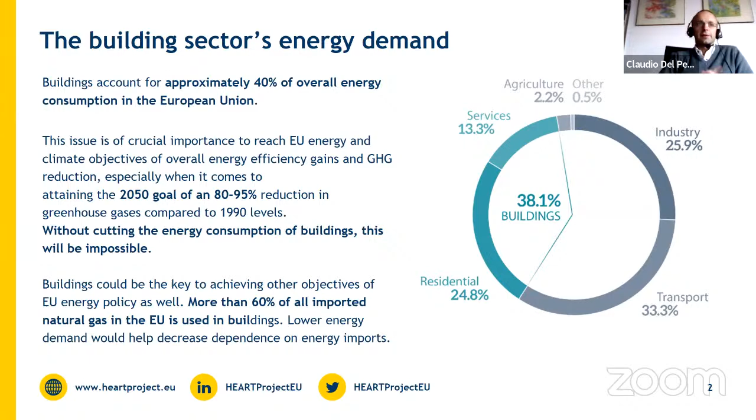Moreover, considering the goals set for 2050 that aim at reducing greenhouse gases by 80 to 95% compared to 1990 levels, in this context we have to know that just 10% of existing buildings in Europe are energy efficient.

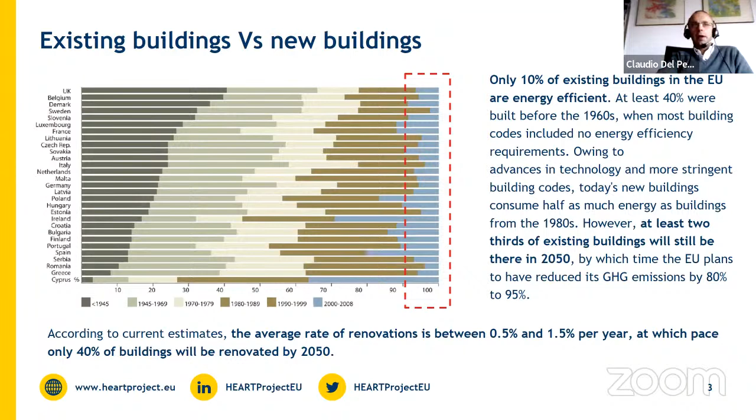So it means that by 2050, just 40% of the current building stock will be retrofitted. We need to increase this number if we want to strongly and quickly improve the energy efficiency of the building sector. In such a context, we decided 4 years ago to start the HEART project.

It's a project funded by the Horizon 2020 program. It will end in the middle of next year. Here you can see the website, the LinkedIn and Twitter account of the project. We, Polytechnic Milan, are the coordinator of this project.

We are 16 partners, and the interesting thing to notice is that just 4 partners are academic partners. All the other members are small, medium enterprises. So there is a strong contribution of SMEs in developing technologies and components.

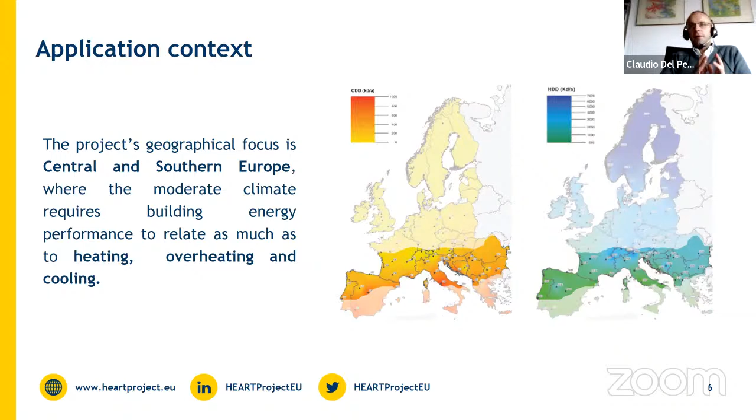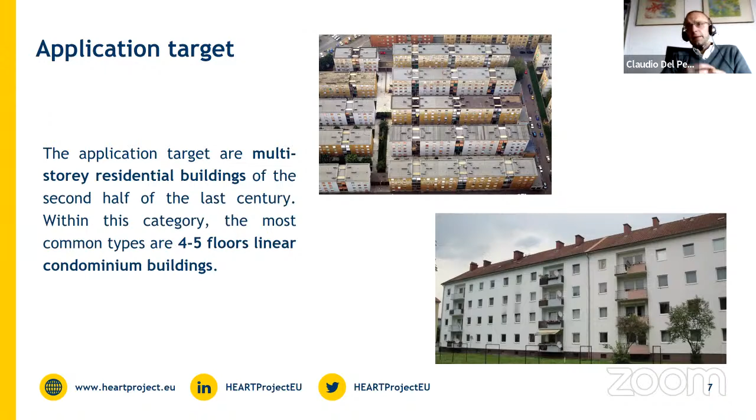The application context of the project is Central and Southern Europe, where we have a climate that requires heating but also cooling, so we have to face both problems during the year. The application targets are multi-story residential buildings, the typical social housing building we have along Europe, composed of 4, 5, 6 floors, and typically they are linear condominium buildings.

We have in the project 5 objectives. The first one is to develop systemic cost-optimal solutions for energy retrofit. In particular, we want to decrease the installation time, and we want to ensure a payback period lower than 15 years, which is quite ambitious without subsidies, obviously.

The second objective is to develop, update and adapt innovative technologies for their systemic integration. The idea is to take existing technologies, update them, upgrade them, and make them synergistic, so that we can apply the toolkit with a set of technologies that properly interact and communicate with each other.

Number 3, we want to foster the building's smart upgrade. We speak every day about smart buildings, but the issue is how to transform existing buildings into smart buildings, because new buildings are hopefully already smart, but existing buildings, which are the big problem, must be converted into smart buildings easily.

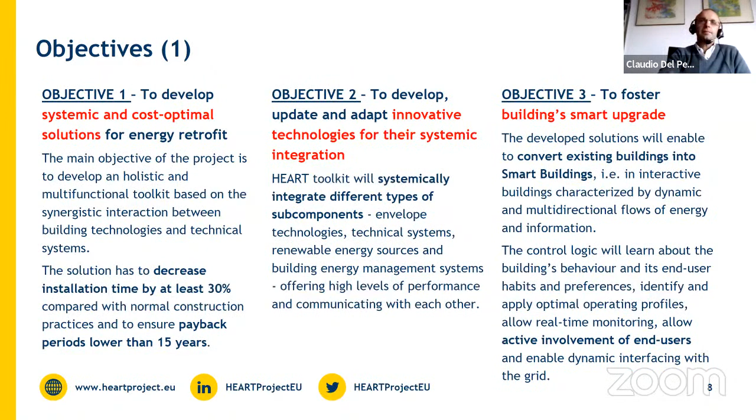Objective number 4 is to support and improve the decision-making process of the retrofit activity. The idea is to support the designer, the decision maker, to identify the cost-optimal solution to retrofit an existing building.

Objective number 5 is to promote energy-efficient financing. The idea is to foster and simplify investment into retrofitting existing residential buildings, which nowadays are not an attractive market for investment funds.

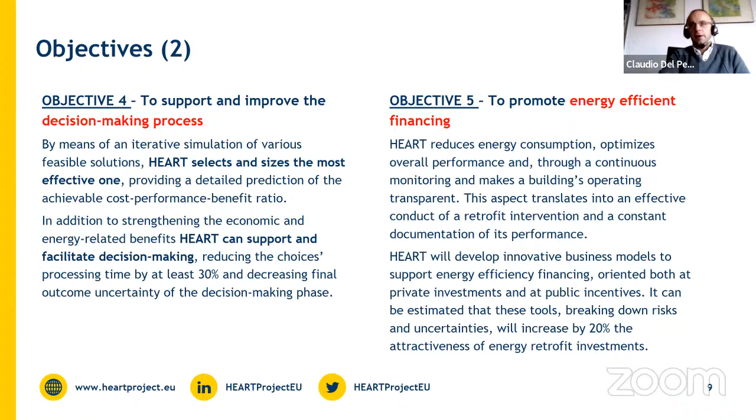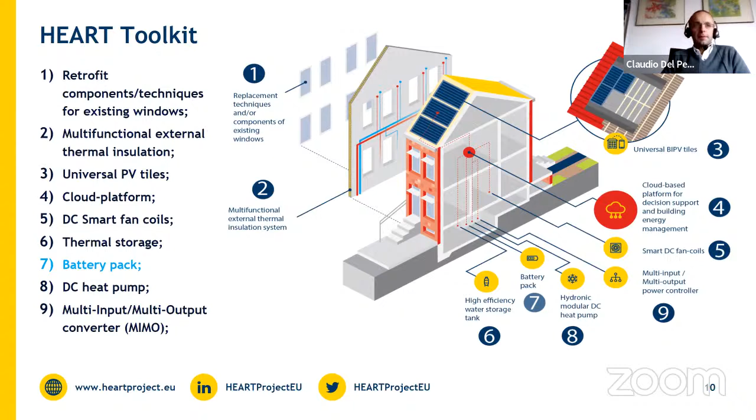The first one is retrofit elements and techniques for existing windows. Then we have a multifunctional external thermal insulation. Number 3, universal photovoltaic tiles to generate renewable electricity. Then a cloud platform, DC smart fan coils - I will explain how they work later - a thermal storage and battery pack, which is not directly a product of the research but a market component simply integrated in the toolkit. A DC heat pump, and a multi-input, multi-output converter.

Now I go more in detail. The DC smart fan coils are elements intended to substitute existing radiators, the typical element we have in such residential buildings to provide heating. The idea is to take off the existing radiator and install this new component that can provide heating and cooling, at the same time using the existing pipes, the existing hydronic networks of the building, even if the pipes are not insulated, without invasive intervention on the hydraulic network.

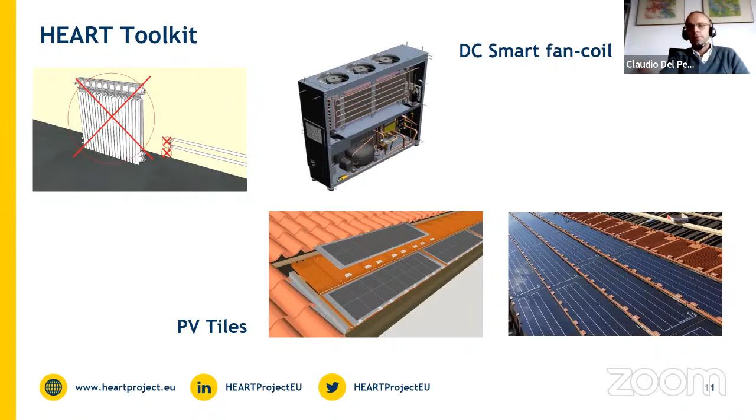Then we have the PV tiles, because if we want to reduce the demand of an existing building, we need renewable energy, and the most convenient way is to use photovoltaic and solar energy. These tiles are intended to substitute existing tiles in a building, and they can be easily integrated into an existing roof. They are cost effective because the basic component of the tile is made with recycled plastic, and then we have a customized PV panel - you can see it in the picture on the right.

Then we have a DC heat pump. Again, we are powering both the fan coil and the heat pump in direct current, avoiding the transformation between DC and AC, because DC current is directly generated by the PV plant and so directly used to power the appliances. The heat pump also has a combined thermal storage with PCM, with the aim to store as much as possible the electricity generated during the day from photovoltaics, and to avoid using the heat pump and smart fan coil during the night, avoiding buying electricity from the grid.

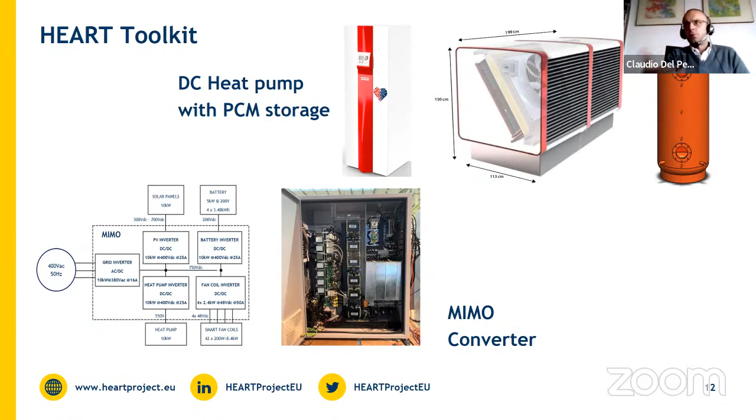Then the MIMO converter is simply a power converter that manages the DC and AC fluxes, and it's also interfacing the entire system with the grid, because in some moments we need electricity from the grid, or we need to sell excess electricity to the grid.

Then we have a modular facade with thermal insulation. This facade can be applied, overlapped to the existing walls, and provides thermal insulation, but we also have an air gap that can be used to install new elements, for example new wires to power the smart fan coils, or new pipes if needed.

Then we have retrofit components and techniques for existing windows. The idea is to maintain the part of the window that is still efficient, for example the frame. In this case you can see in the picture the wooden frame of the first case study in Italy - it is still efficient, also from an energy point of view. What we did is substitute the old glass with a new high performance glazing with good thermal insulation and also solar control features.

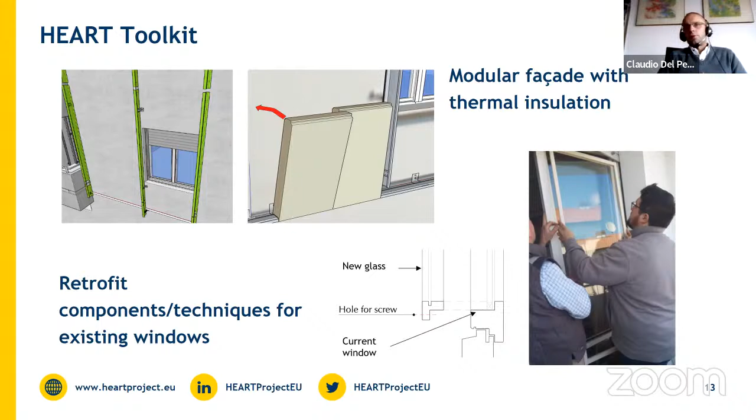Here you can see the structure of the cloud-based platform. This platform works as a DSS, a decision support system, in the pre-retrofit activity. On the platform, a simplified energy model of the building is running, and through this model we can forecast the energy performance but also the economic performance of the retrofit intervention, and provide useful data to the construction stakeholder, the funding stakeholder, and the management stakeholder. So this platform acts as a decision support system.

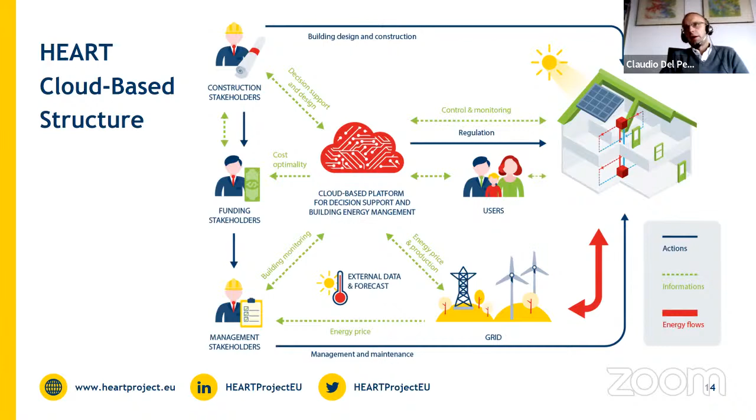After the retrofit, the same platform runs the detailed energy model of the building and acts as an energy management tool. The same building model is used to interact with external services, for example information coming from the grid or weather forecast services, and provides the energy management logic. Users can also interact with the platform to see the performance of their dwelling, or just to change the set point temperature in a specific room, via a user interface through a mobile app.

So you can see here the scheme of the functioning of the decision-making phase.

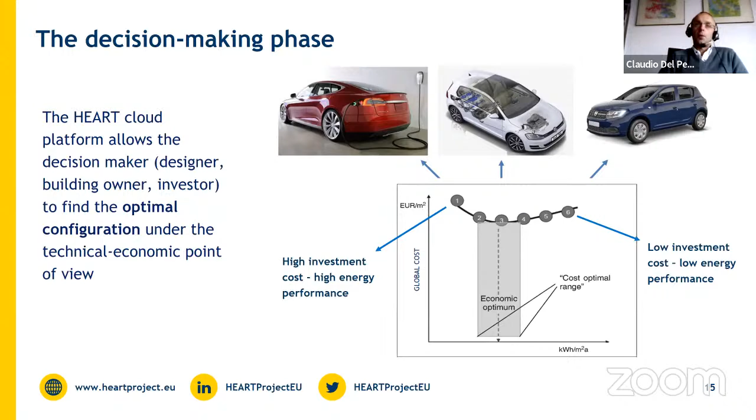So the platform is simulating the energy and economic performance of different intervention alternatives—different thicknesses of insulation, different amounts of photovoltaic tiles, different numbers of thermal storages, and so on—providing results in terms of global cost and overall energy performance. So the decision maker can identify the cost optimal option among all the feasible possibilities.

Then in the operational phase, the platform compares the real energy consumption of the building with the expected consumption simulated by the energy model. If there is a significant difference between the two trends, it provides alerts to the energy management, to the facility manager, and to other stakeholders, to underline that there are problems from the energy, technical, and economic point of view.

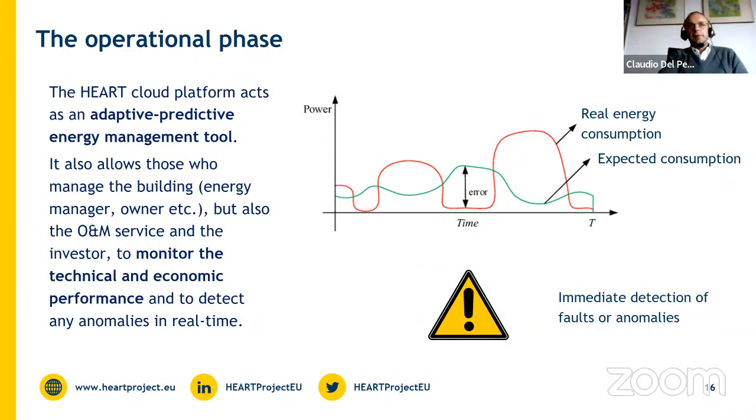This way, the stakeholders can immediately interact with the system and identify the problem, avoiding uncertainties in the real performance. And here you can see the ICT infrastructure.

The entire energy management system is based on a robust ICT infrastructure using wireless communication. We use two different standards, Wi-Fi and narrowband IoT. The idea is to avoid complex and expensive wiring of the building, because we're speaking about existing residential buildings, so we don't want to be too invasive in the dwellings.

This infrastructure allows the exchange of data between all the elements—the smart fan coil, the heat pump, and so on—a building gateway that is the local brain within the building, and the cloud platform that is the cloud brain. So there we have two levels of control.

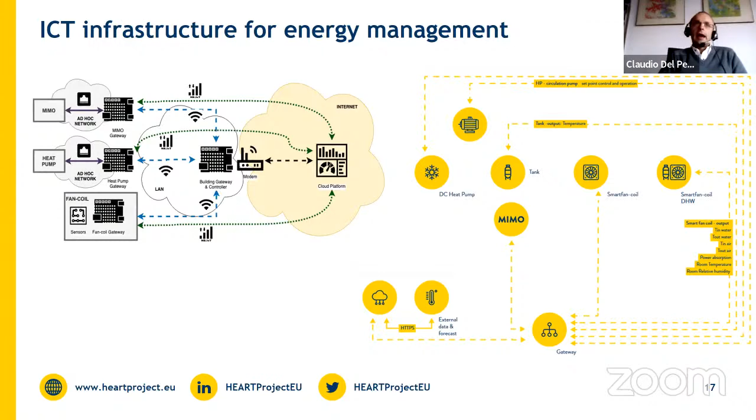One local level within the building gateway, and a cloud level that is always operative and interacting with the elements on the field. So every component of the system, of the HEART toolkit, communicates with the gateway and with the platform. This structure allows perfect monitoring and management of the entire system.

We are applying this toolkit in two different case studies. The first one is close to Reggio Emilia in Italy, where the work is almost finished, and the second one is in Lyon, France. We had some delays in both case studies due to the COVID pandemic, but in any case we plan to finish the works by the beginning of next year. Then we'll have around six months of monitoring activity to take under control the real performance of the system.

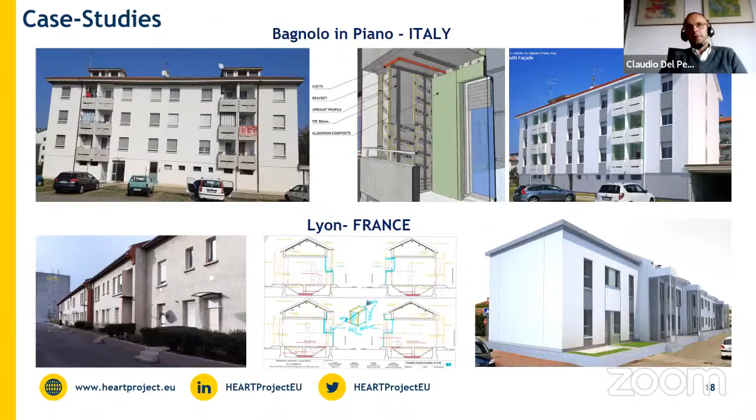Thanks a lot for your attention.

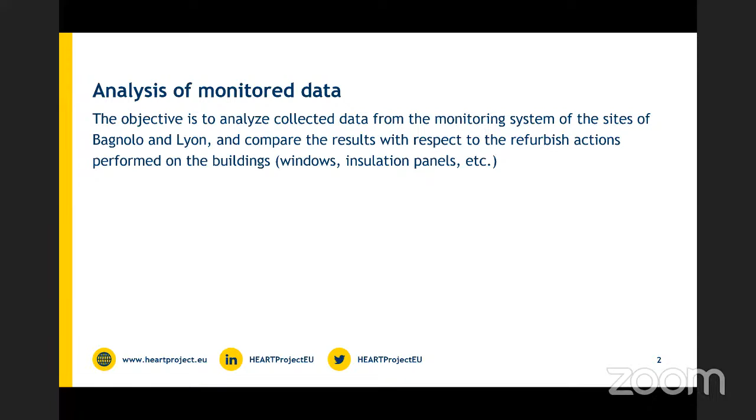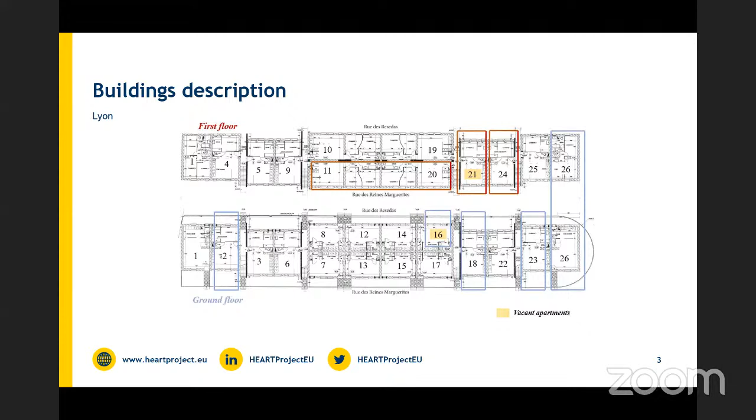As already mentioned by Claudio, we have two demo cases, in France and in Italy. This is the plan of the buildings, and we have monitored data from September 2019 up to April of this year. We are monitoring the main indoor conditions—temperature, relative humidity, and CO2 concentration—and for the French case, we are also monitoring global electricity and lighting consumption.

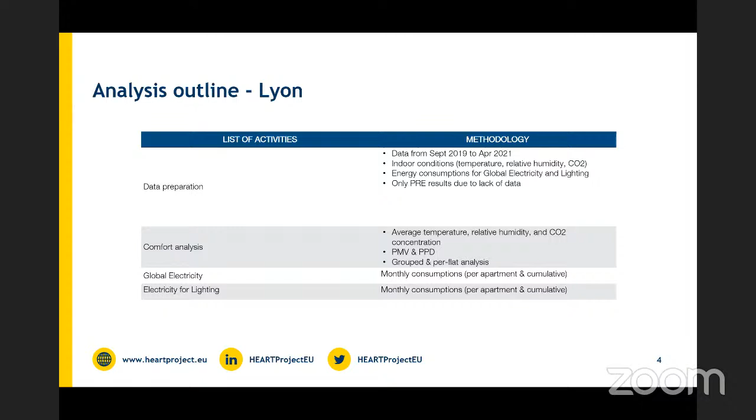So the main activity was to analyze the comfort conditions, and then we also present the main consumption in electricity and lighting for the French case.

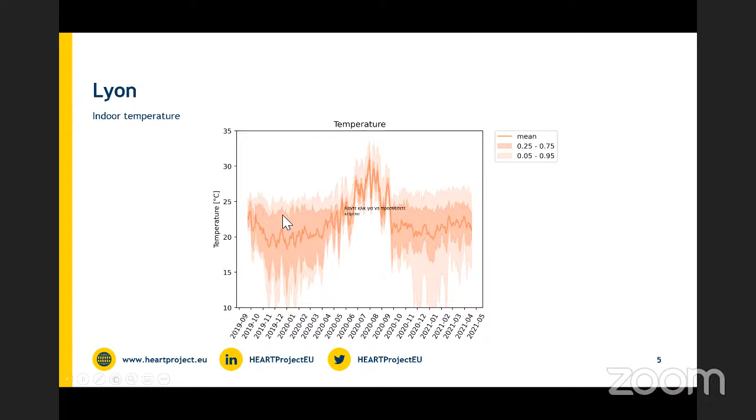In Lyon, these are the average indoor temperatures of the monitored flats. We can see that 50% of the time during the winter season, the temperature ranges from 15 up to 24 degrees. But if we look at the flat level, there is an important difference between the different flats—some have an average value of about 23 to 25 degrees, while other apartments have very low temperatures, around 15.

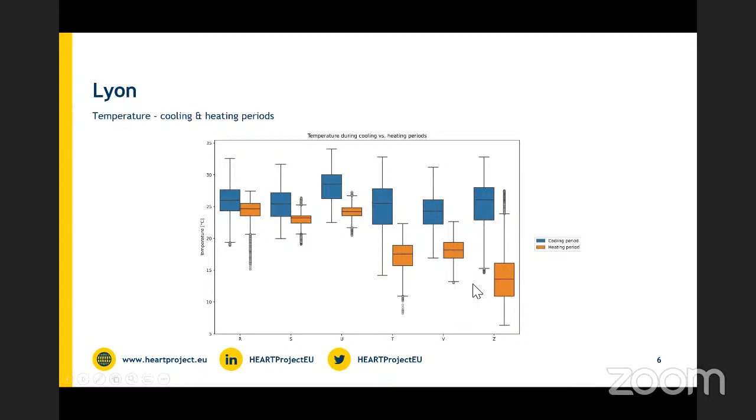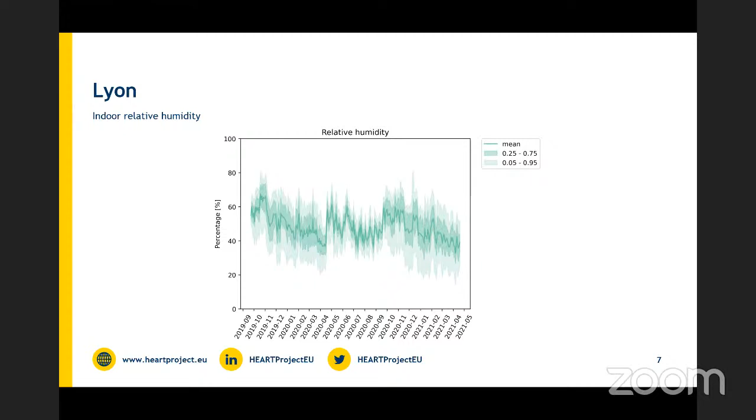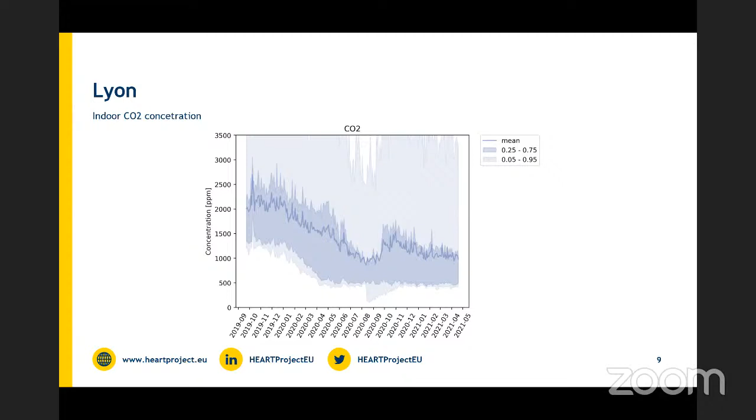This is the CO2 concentration. We can see a trend of decreasing CO2 concentration. In winter 2019 and 2020, the average concentration was quite high inside the monitored flats, and it decreased quite a lot during 2020.

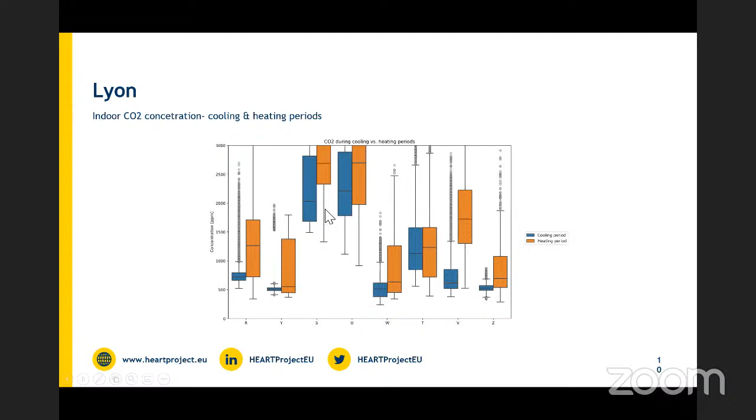Again, here we see this concentration for all the apartments. There are some apartments with very high concentration and others with lower.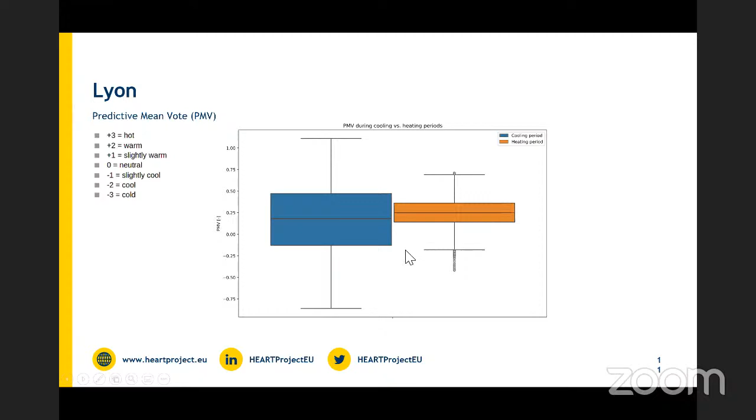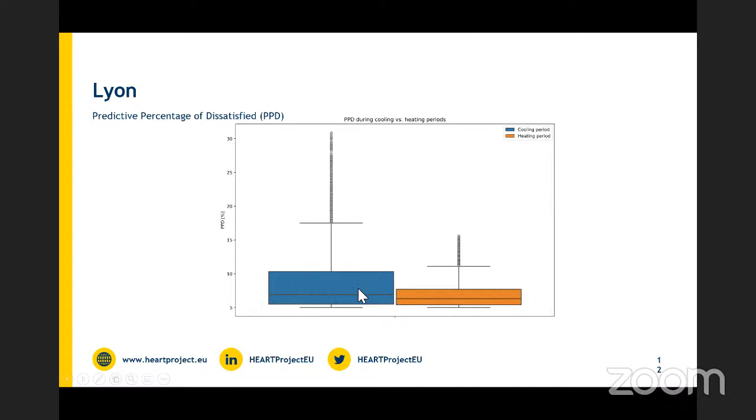We also compute the predicted percentage of dissatisfied, basically the percentage of people that will not be satisfied under that condition. You can see that the mean value is slightly above 5%, 7%, so it's not high actually.

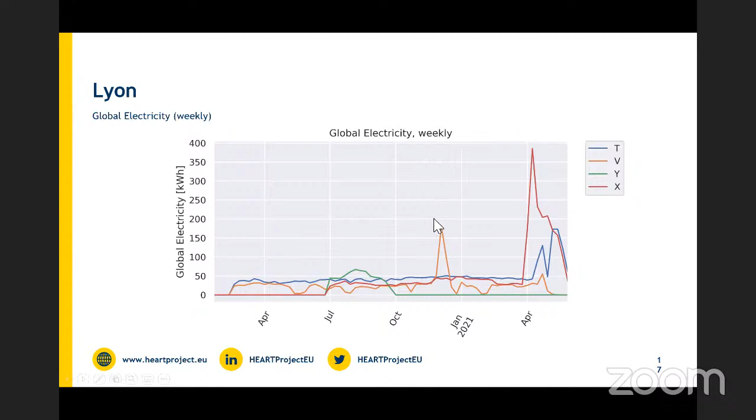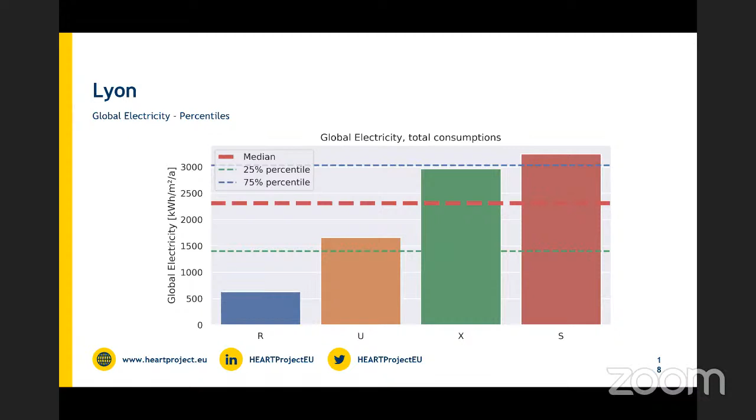Here we are seeing the weekly global electricity consumption of the flats. Here is the total consumption divided by flats as well, and the light consumption, again the weekly one.

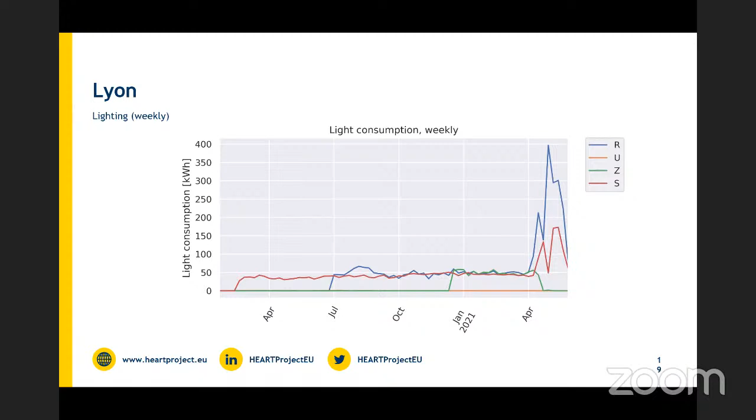We are still checking the units, the numbers, so these are always preliminary data. Let's say it's more a work in progress, but still, this is what we have. Again, this is the total consumption per flat.

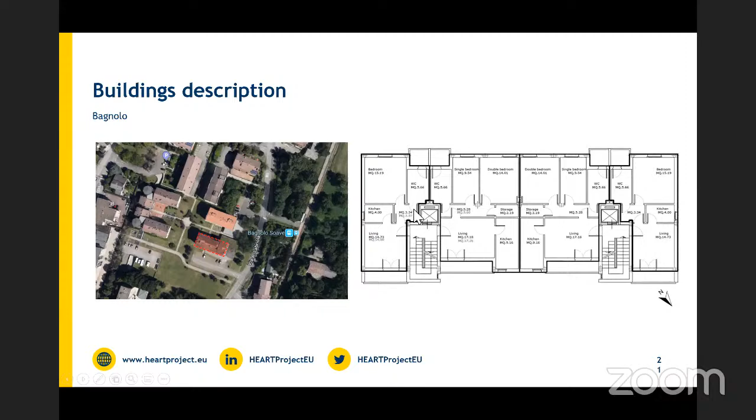And then we have the Italian demo case, social housing in Italy. The data we collect are more or less the same, but in the Italian demo case we also have the chance, since they finalized the substitution of the windows in September 2019, to compare before and after that specific intervention.

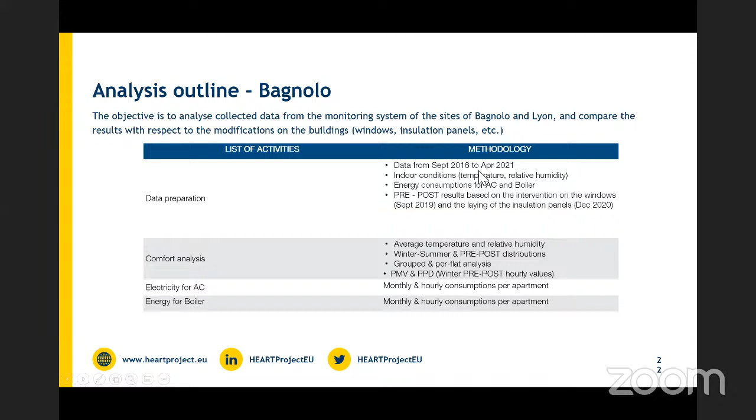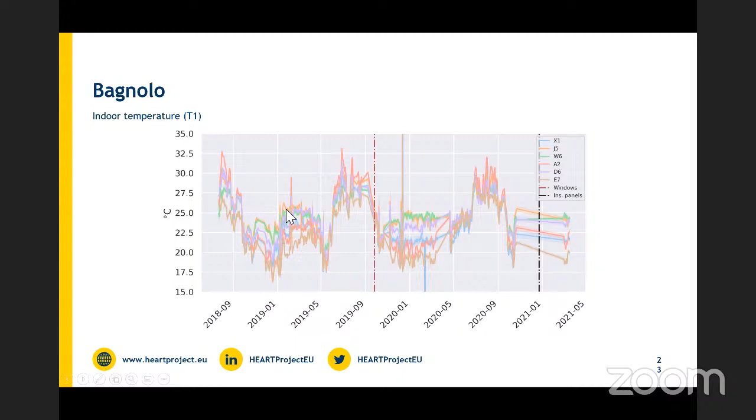But in Bagnolo we are also able to see the difference before and after the windows were refurbished. We can see that we have a much more compact distribution of internal temperature inside the flats, meaning the temperature inside the flat remains much more constant than before the refurbishment.

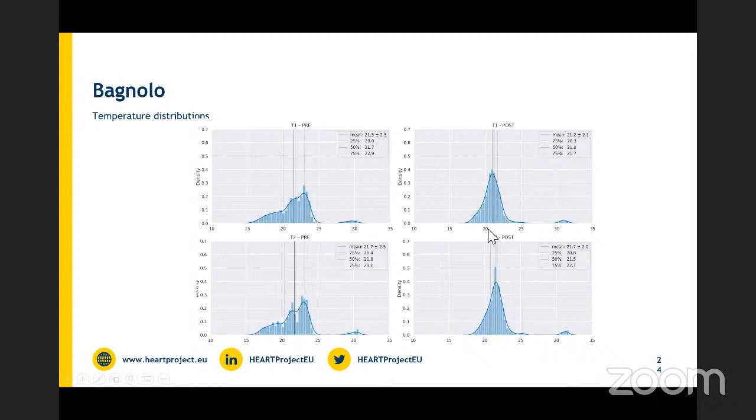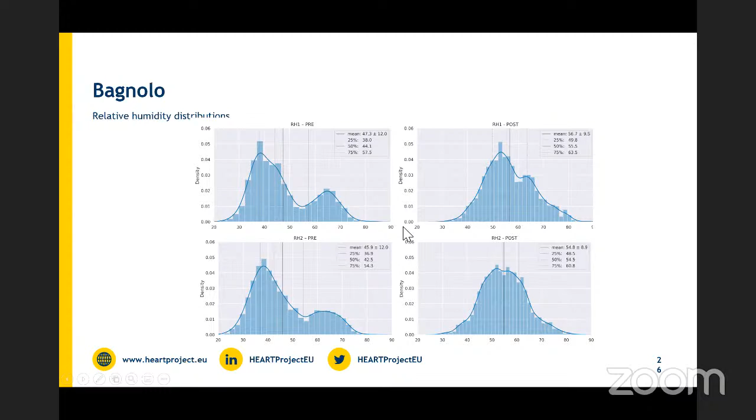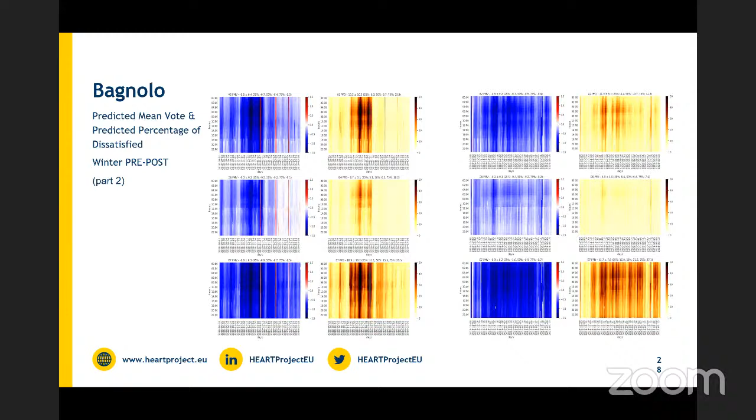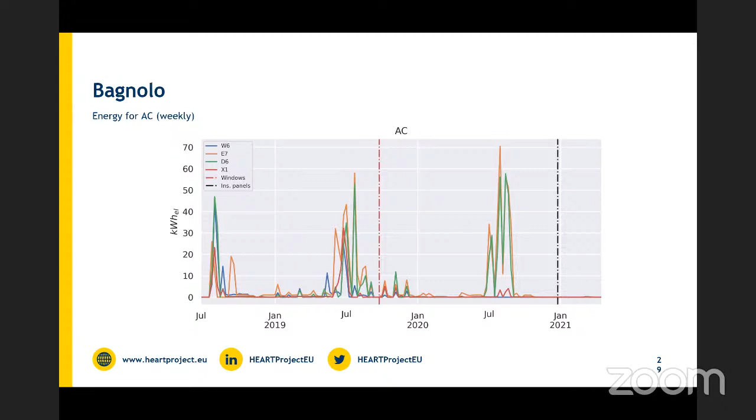Yes, these are the main outputs we have had a chance so far to analyze. These are the energy consumption for the air conditioning in Bagnolo for each flat, aggregated as cumulative weekly consumption, and this is the energy consumption for the boiler, also at weekly resolution.

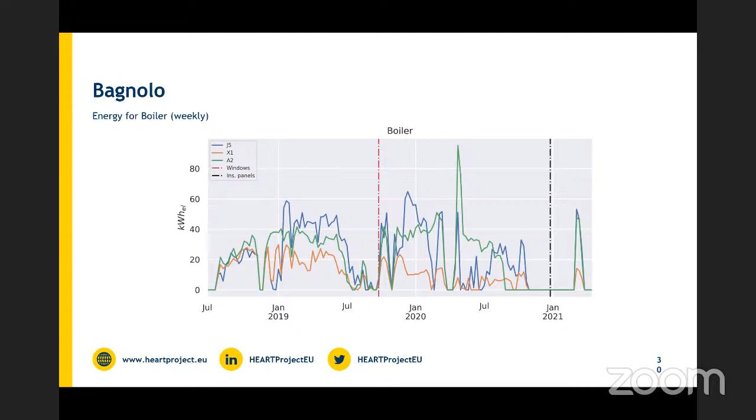So to conclude, these are preliminary results. We are still in the process of collecting and verifying the data we are receiving. But from this preliminary result, we can see an effect, at least on the distribution of temperature and relative humidity, that just considering the refurbishment of the windows already increases comfort in the flats.

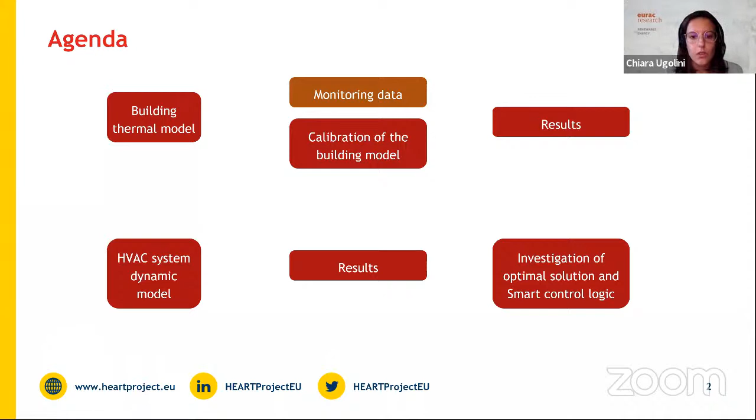Okay, so the thermal model of the building has been implemented by Polimi with the SketchUp and EnergyPlus model software. The aim of this building model is to understand the heating and cooling demand of the building before and after retrofit, in order then to implement the building model into the HVAC system dynamic model.

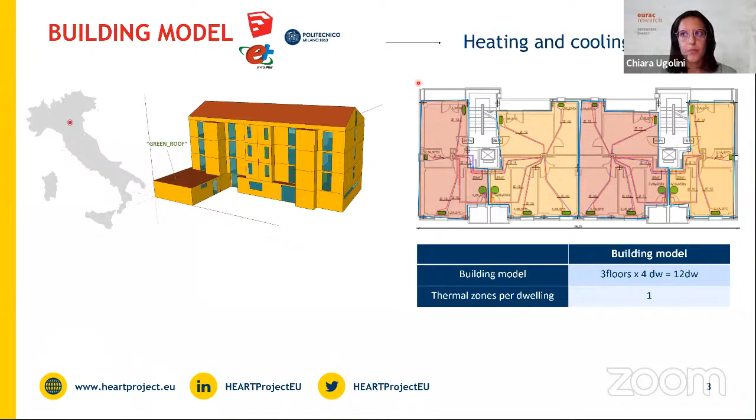So what has been done is that the building model has been calibrated with the monitoring data. As Pietro already mentioned, we had before-retrofit monitoring data and also after-windows-renovation monitoring data. We still miss the monitoring data after the renovation of the whole building. So by changing some boundary conditions, the building model has been calibrated in order to match the energy consumption resulting from simulation to the monitoring data.

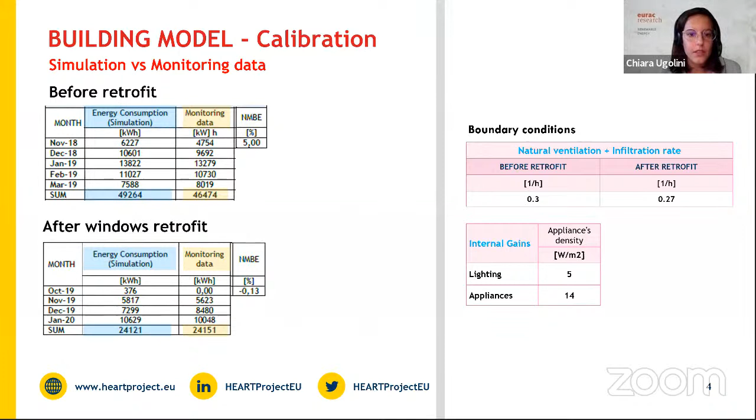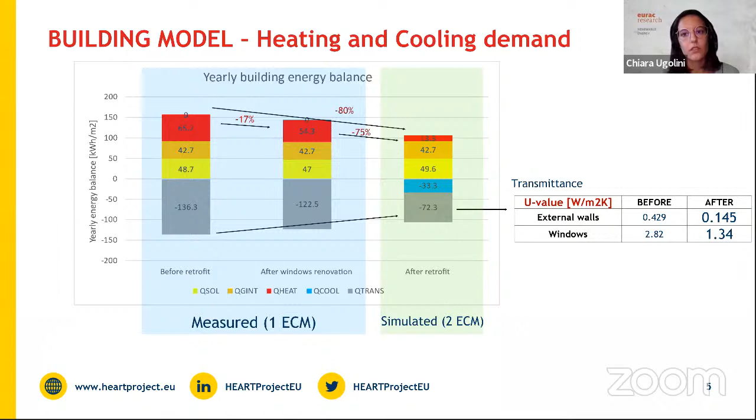Then we implemented the building model into the Trnsys model. So we, as EURAC, have developed the HVAC system model. The goal of this is to understand the electricity demand, the primary energy demand, to investigate also the control logic, the optimal control logic, to investigate how this system is behaving and how the components are interacting between them.

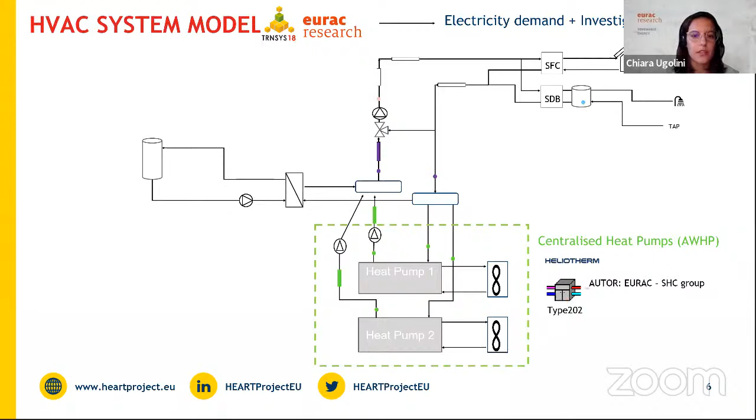So first of all, we had to build this model with components. We built a special component for the centralized heat pump, and then we connected it to a component of the type for analyzing the storage tank. In particular, we have to thank the University of Graz for letting us use these components in Trnsys, and also the University of Ljubljana for having tested this PCM storage tank.

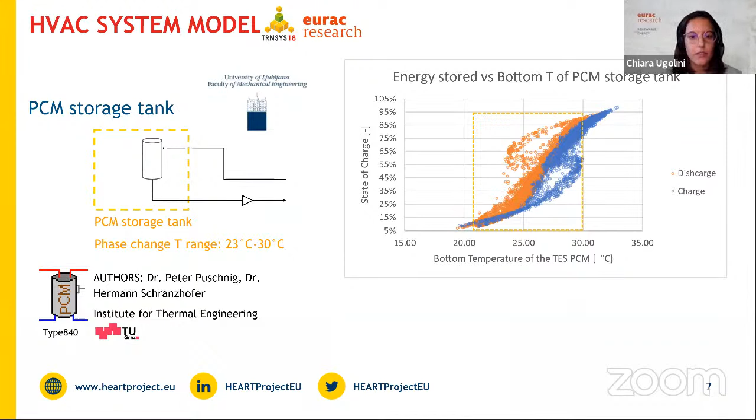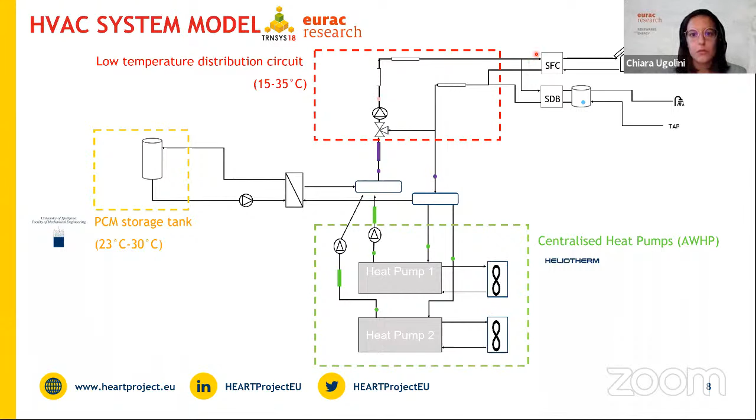So back again to the system. We have also modeled a low temperature distribution circuit. We have water in here that is circulating at around 25 degrees, since the emission systems are not radiators but fan coils that are micro heat pumps. In particular, they are water-air heat pumps, and smart domestic hot water boilers are water-water heat pumps connected to storage tanks. We have modeled them, one per each dwelling.

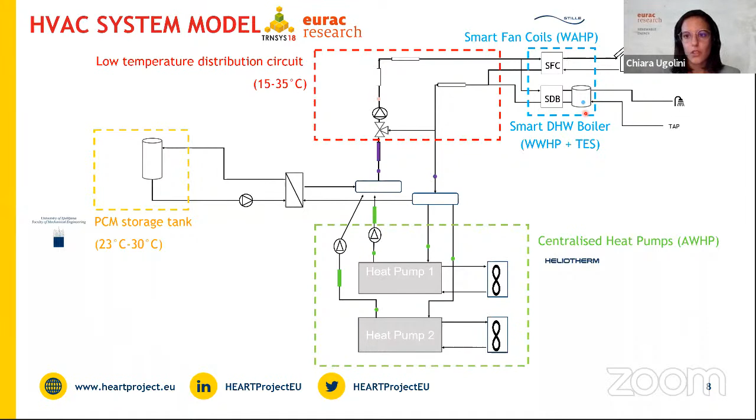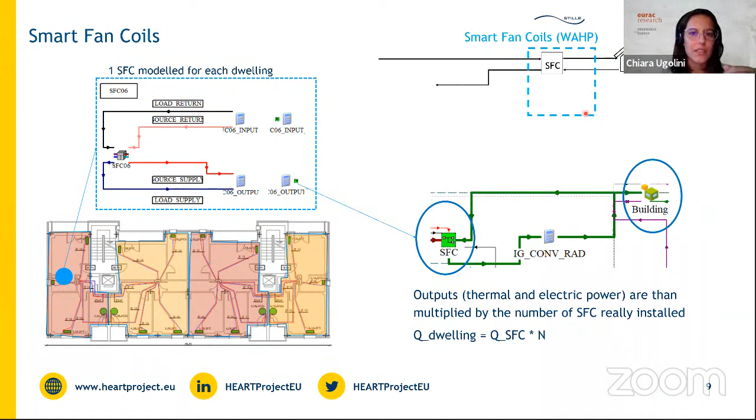And yeah, I will not go into detail of the model. I will skip this, but if there are any questions, I will answer. Again, the goal is to understand how this system is working, how the components interact between them.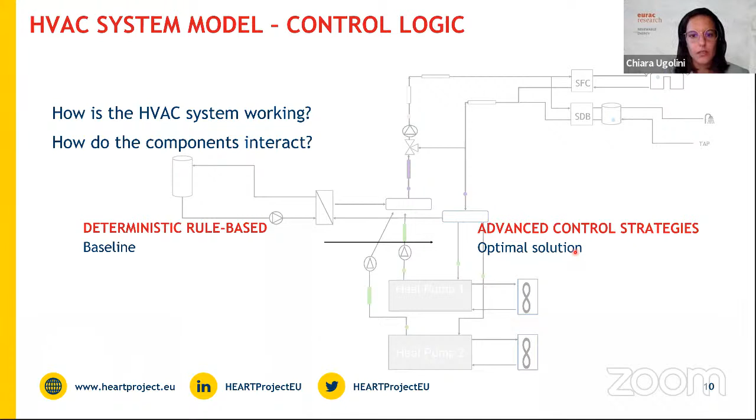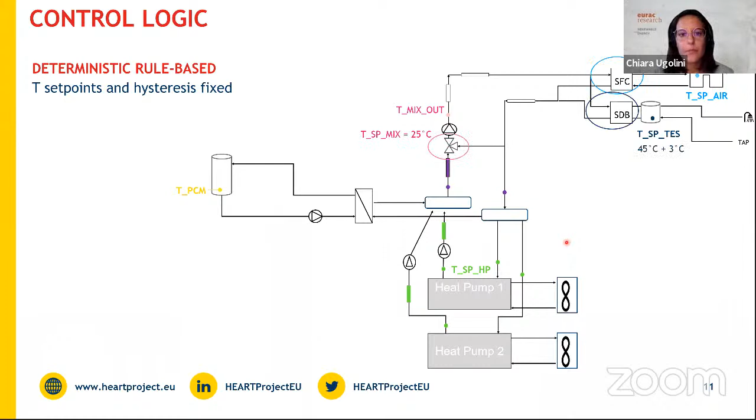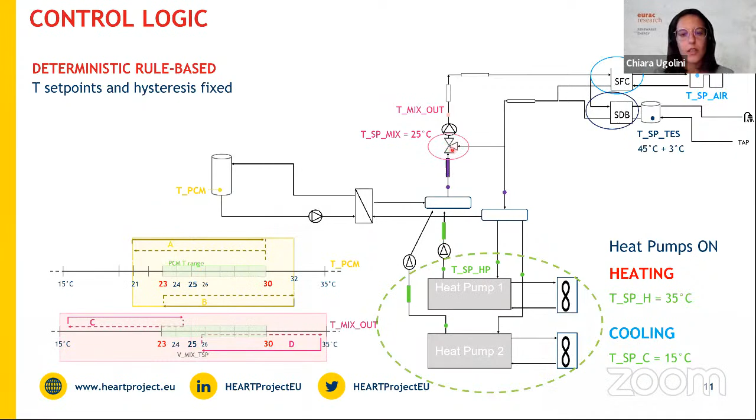So firstly, we had to implement a deterministic, strong rule-based control logic. That was our baseline, and then from that we analyzed advanced control strategies to find the optimal solution. For the deterministic control logic, we have fixed set points and fixed hysteresis. I'm not going into the detail of the controls, but this control logic aims to control the on-off of the heat pumps, of the fan coils, and the operation of the mixing valve. And this is our baseline.

These are the results of our baseline. From the thermal model of the building, we have a building energy demand that we already saw, and from the analysis with TRNSYS, we have the total electricity consumption. This is shared mainly between the fan coils and heat pumps, which are the main contributors to total electricity consumption. For our baseline, this electricity is not from PV production, but only from the grid.

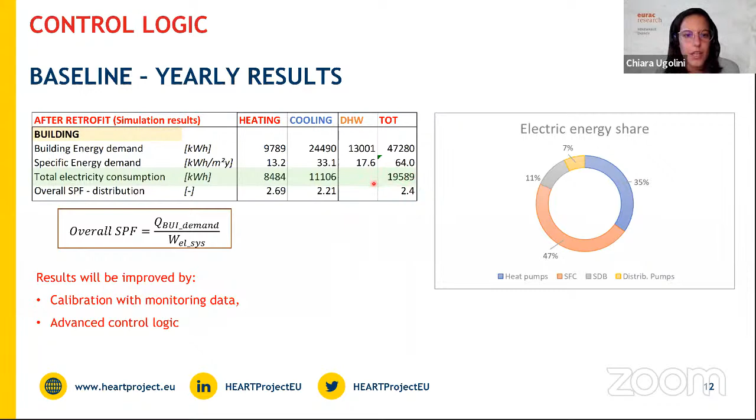We know that with monitoring data we will for sure improve things, and these are only simulation results, so they will change a little bit. With advanced control logic, we can optimize this system and reduce electricity consumption, exploiting the PV production. I'll show you something.

If we study the operation of the system and the building demand, in some days, for example summer days, we can have domestic hot water production and heat demand during the first hours of the day, and then cooling demand from the building after lunch. If we charge the storage tank correctly, we can use the heat of the storage tank to heat the building. So the PCM storage tank releases heat to the building, and then the PCM cools down.

During the afternoon hours, the heat from the building goes to the PCM, and the PCM heats up, so we don't have to turn on or run our heat pumps. It's a sort of balance.

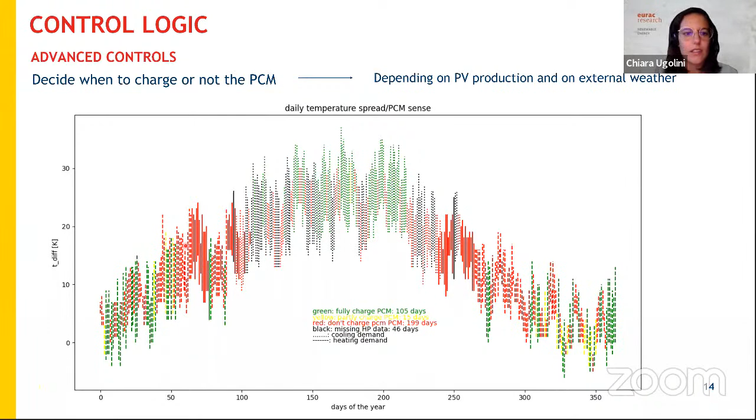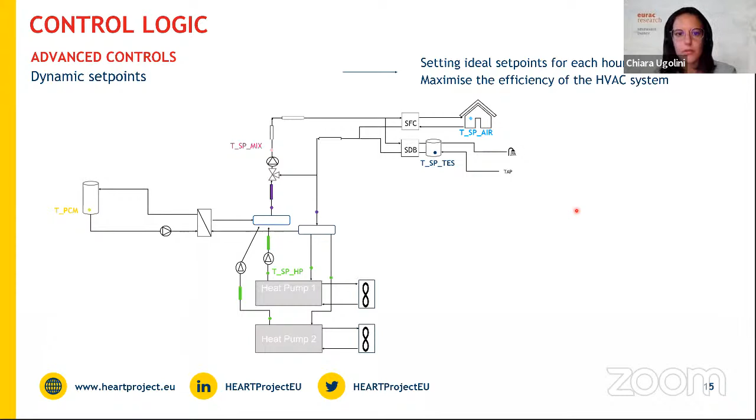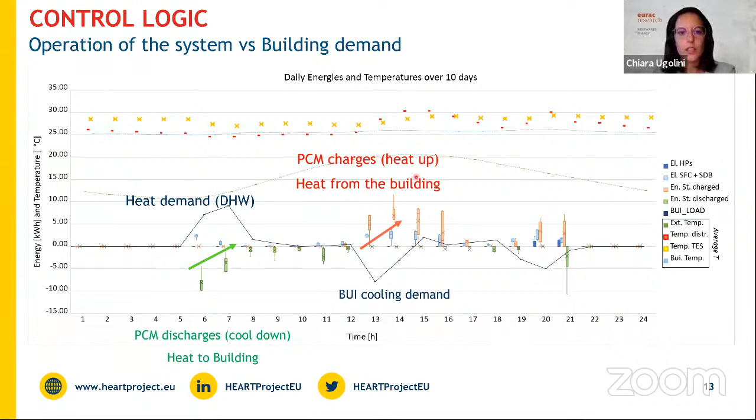Also, with dynamic set points, if we set ideal set points for each hour for the distribution loop, at which the heat pumps should operate, we can maximize the efficiency of the HVAC system. Moreover, if we can also predict the building demand and the weather conditions, we could for sure improve our control.

Mariam Mir, a PhD student, has studied in her PhD thesis some adaptive predictive control, and she implemented it into the TRNSYS model we built. She found that this advanced control can increase renewable energy self-consumption, reduce peak load, exploit PV production better, and optimally schedule the domestic hot water boiler production and the PCM charging or discharging.

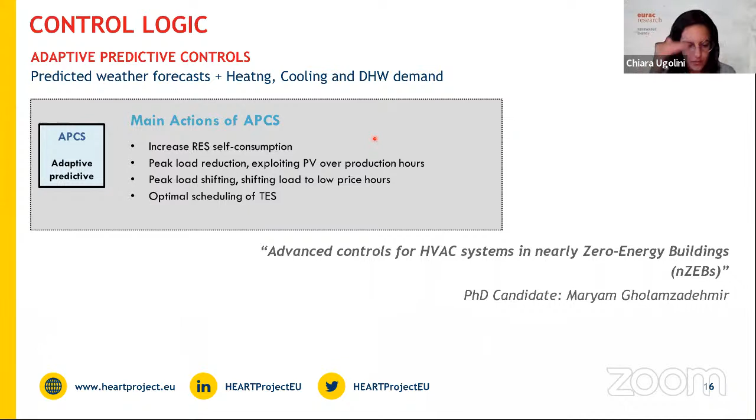We can also have much better control and optimally reduce electricity consumption. Here are some results in conclusion. I've also taken this slide from Maryam Gholamzadehmir's thesis. We can see that if we study the system without PV production and without using the PCM, we have a certain amount of electricity taken from the grid. But if we implement PV, then PCM, then deterministic rule-based control, and then the adaptive predictive control, we can save up to 57% of energy taken from the grid. So of course we also have cost savings.

So to recap everything I was talking about, in the HEART Toolkit we will implement this control logic in order to achieve the nearly zero energy buildings goal.

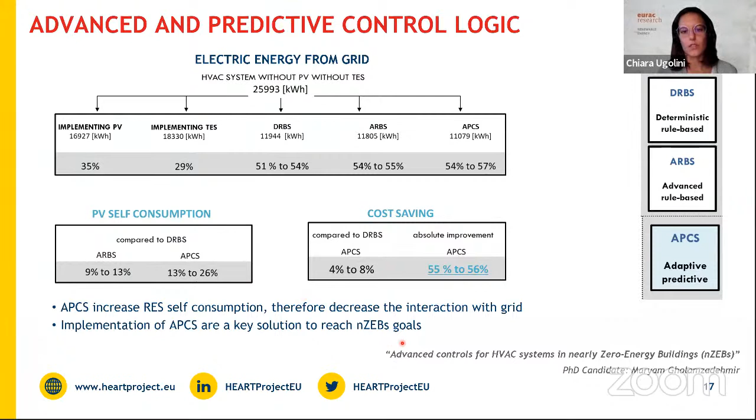So it was a bit technical. I hope it was good to listen to, and if you have any questions, just ask me. And now I don't know how to end my sharing. Okay, here.